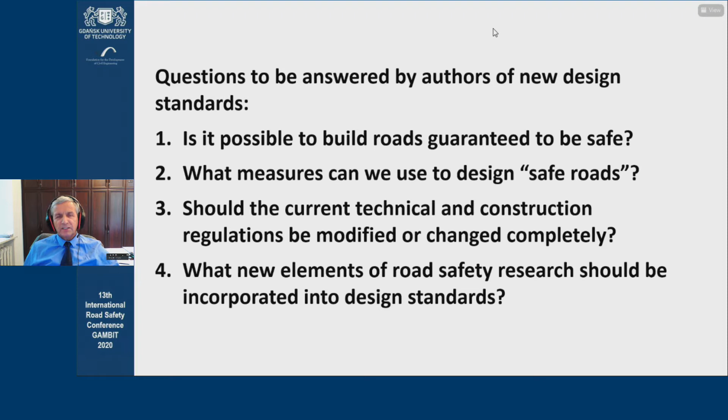The degree to which it's possible to build roads guaranteed to be safe. What measures can we use to design safe roads? And also, should we just modify the existing regulations, or perhaps we should develop new regulations as a whole? And what new elements of road safety research should be incorporated into the new guidelines? I think what this says is pretty obvious, so I don't want to spend too much time on this.

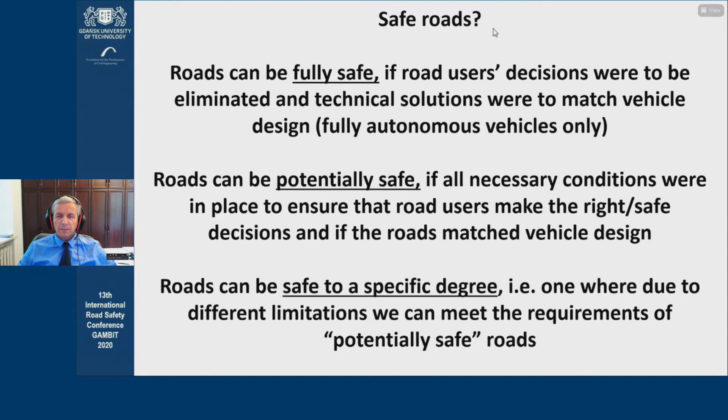Obviously, we cannot talk about fully safe roads. If that were to happen, we would have to eliminate the human role. But we can talk about potentially safe roads. So how do you create potentially safe roads so that they meet other requirements of people and vehicles? But we also have engineering practice and some limitations. As a result, we cannot always build a potentially safe road. So the question is, what do we do if we are unable to tick all the boxes and meet all the criteria?

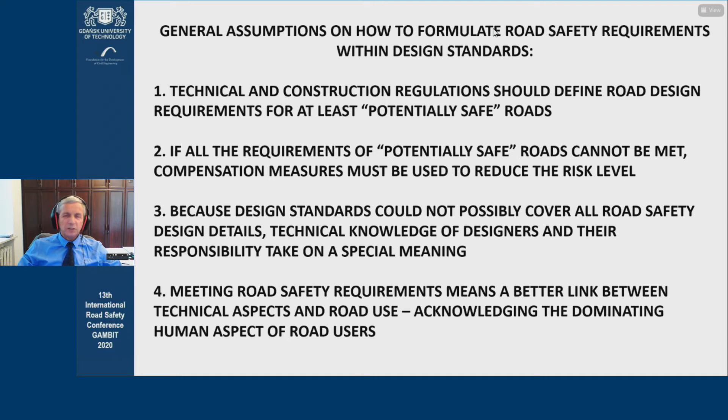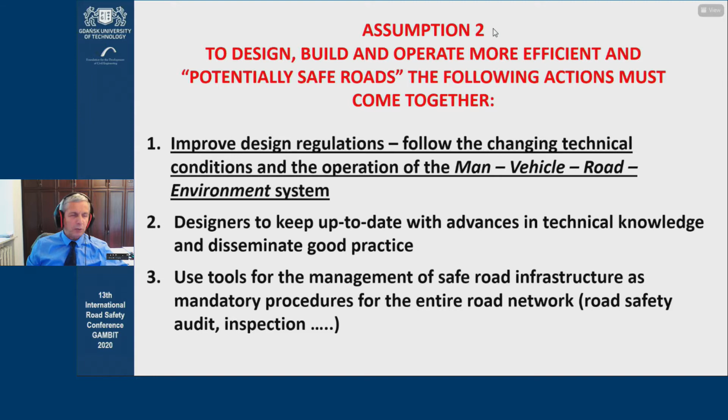Now, how to design potentially safe roads? We combine these things. Obviously, we want to have new standards and new regulations, but we want to build on the technical knowledge and expertise of engineers, and we'd like to use road infrastructure management tools such as inspections or audits. And there are also other regulations.

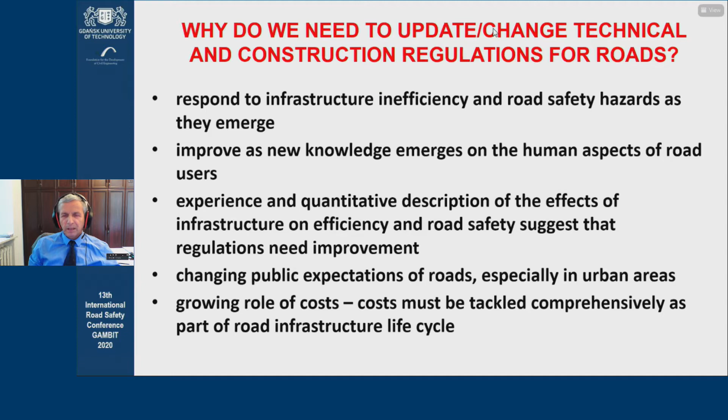The question could be, why would we want to modify the technical standards in the first place? Especially because we've had the experience, we've been gathering it over the years. We're short on time, so I cannot talk you through all the knowledge, but we definitely know a lot about human aspects. But what changes are user expectations. The road is seen more as a public space, which means that there are different expectations on how to use it. Costs are becoming increasingly more important when it comes to life cycle costs.

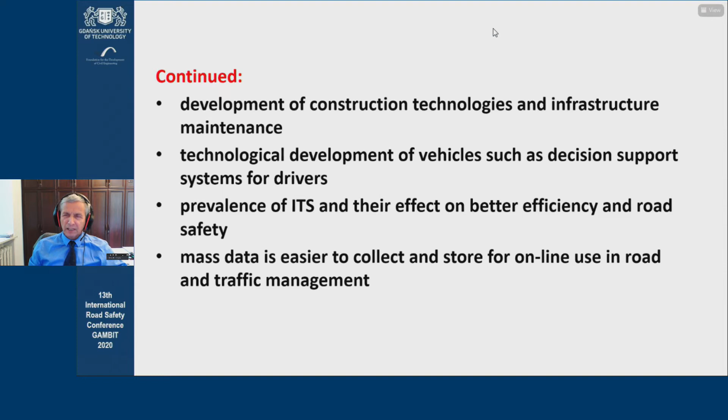Plus, there are new technologies that we can use for road construction, but we also have ITS. And it's a great opportunity to include ITS for road operation and management. But these elements should be there early on when we first design roads, so it should be part of the technical standards. Plus, there are some additional impulses for change. It's not that we feel we're forced to do it, but at least it suggests that there's a real need for change of the standards.

The standards we have discourage designers from using non-typical solutions, because if you want to do something that's non-standard, the bureaucracy is very tedious. But then again, we get requests for deviations from technical standards because people look for cheaper solutions, which aren't always better, but they are cheaper. On top of that, we know that normative regulations couldn't possibly describe all the conditions.

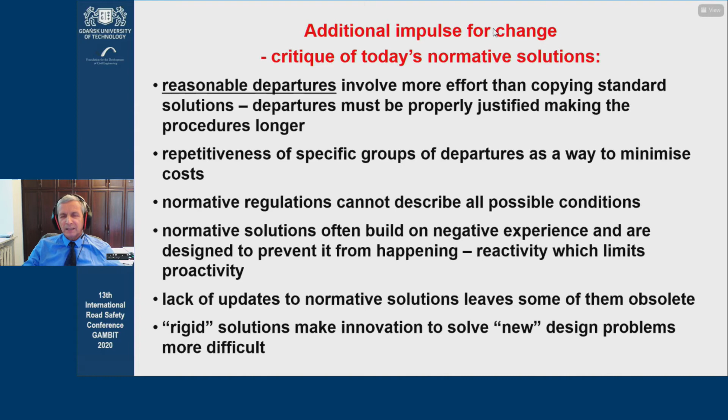And there is one more element, which is that way too often the regulations we build are based on negative experience, like this is not working, let's change this in the regulations. However, what is missing is for the modern day technical standards to be proactive, and most of them are reactive. So, moving on to our task. What we began with was an assessment of the current design regulations.

So what we did is we ran user surveys, and then we conducted an expert assessment of major projects selected at random, and then we assessed existing regulations. So what are the conclusions? And this is a set of conclusions shared by the authors and by the ministry.

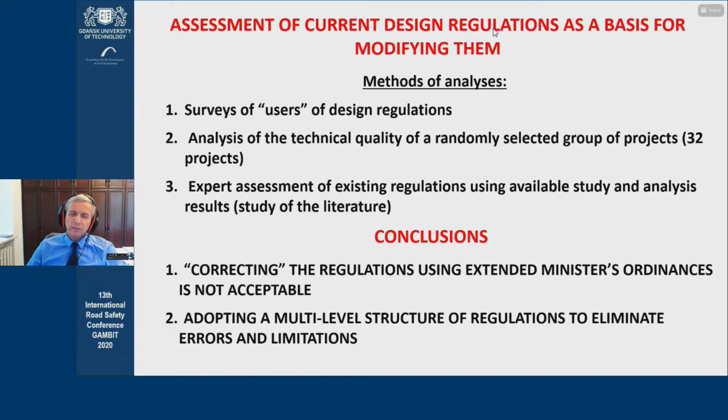What we don't want is to just correct or adjust the regulations, and instead we should introduce a multi-level structure of regulations or technical standards. Now, quickly, what does it mean, multi-level structure of regulations? Level 1, that's acts of generally applicable law, something that has to be adhered to rigorously. So this means acts of law and ordinances.

And then level 2, these are documents recommended by ministers for transport and others, while this includes certain templates and standards and patterns. And this has to be in line with the general regulations. And then level 3, with all sorts of additional knowledge, including acts of local law.

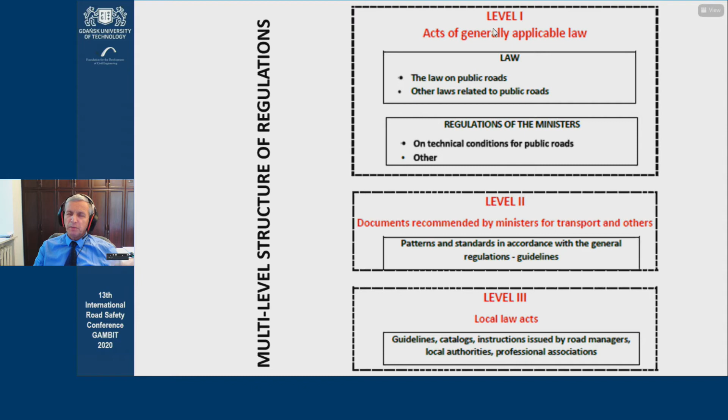So having these different levels means that we have to open up to innovation, and we cannot over-regulate certain elements. Standards and recommendations support technical knowledge, and level 3 is clearly about supporting the technical knowledge of engineers. But yes, there are some consequences, because in this case, engineers have to take more responsibility for the end product. As a result, the new guidelines have to provide more support than they did before.

With Mr. Puczaj, who represents the ministry, we are the co-authors of this, and what you see is a set of guidelines at level 2 designed to support level 1, which is mandatory. So we have guidelines for the investment process, for sections of network, for sections, and the rest, as you can see. But in fact, it's a much broader set of guidelines than before, which means a new quality, a new dimension. And we will be providing recommendations, something we didn't do before.

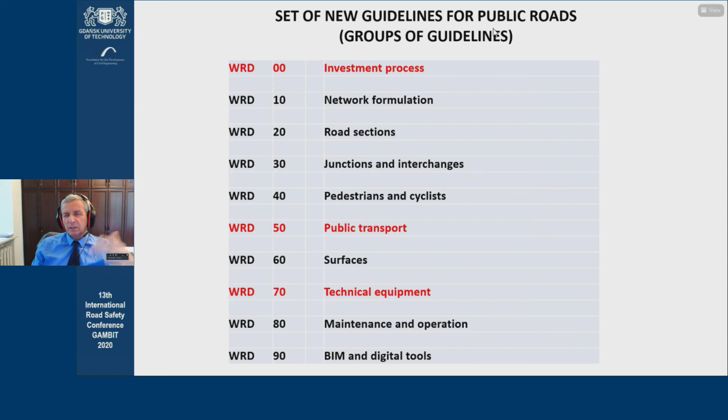We will have a more detailed discussion of the guidelines tomorrow, so I'll stop there. But, well, let's take this example, junctions and interchanges. This really involves 6 separate documents. What are the directions? How do we want to change the design standards? Definitely, the roads should be self-explanatory. The design speed should be linked to road user expectations, and speed management could be already included in the design phase.

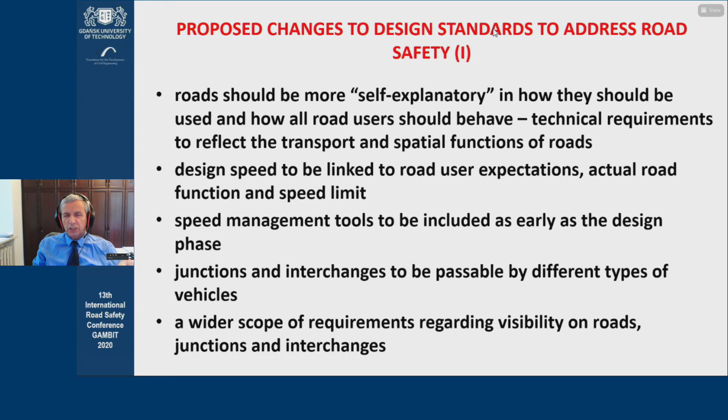When it comes to junctions and interchanges, we have to be clear about how they should be used by different types of vehicles. Plus, we have a wider scope of requirements regarding visibility on roads, junctions, and interchanges. There are some additional elements here as well. Roadside comes to the fore, so safe roadside in place of safety barriers. A better match between infrastructure and the needs of road users, and we have a series of guidelines to cover that. Streets to be treated as an element of public space, and they should meet the expectations of local communities.

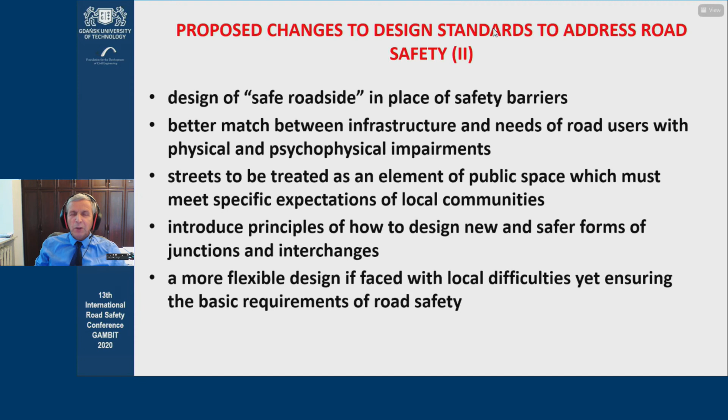New types of junctions, such as turbo or roundabouts. And there may be some local difficulties, and if that happens, then the regulations should provide for more flexibility in the design. However, basic requirements have to be met anyway. In this short presentation, I couldn't possibly cover everything, so it was just meant as an introduction into a more detailed discussion tomorrow.

But just to give you some conclusion, the proposed change to the technical and construction regulations is necessary, and it meets the modern trends. And we are sure that with the new guidelines, Poland will be able to build a safer infrastructure. What's really important is that the recommended design guidelines do not exclude innovation, where it better meets the needs of road users under specific circumstances. And the design guidelines, as they will be presented tomorrow, are now ready for a round of technical consultations. It's important to get everyone's input and make any changes as a result.

And finally, I think it's key to this. Well, we've had different opinions, but we think that the new regulations are formulated in a way that will make designers more responsible or accountable for how they take their decisions. So it's not just responsibility for specific solutions, it's a responsibility for the whole process. So you give them more freedom, but what we don't want them to do is to look for the cheapest and simplest solutions, because that would limit the efficiency and safety of infrastructure.

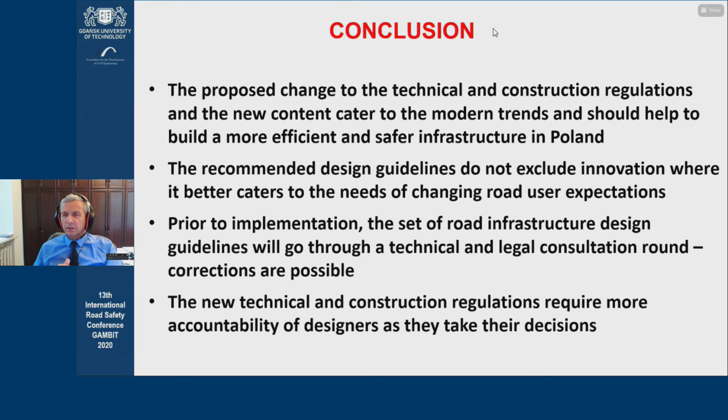There is some risk in it, but I hope that when we finalize the documents, once we've had the consultation, we'll be able to achieve this goal as well.